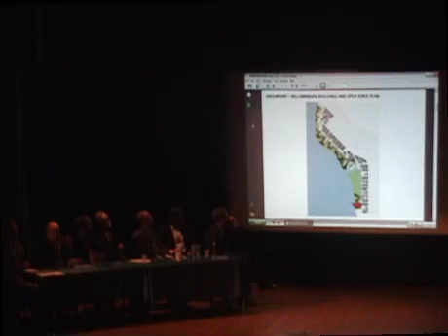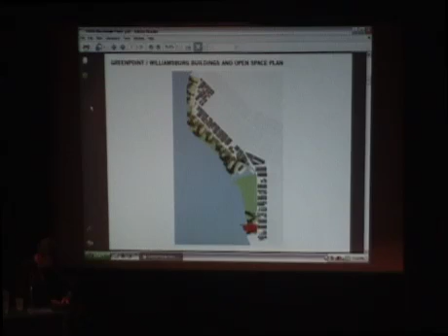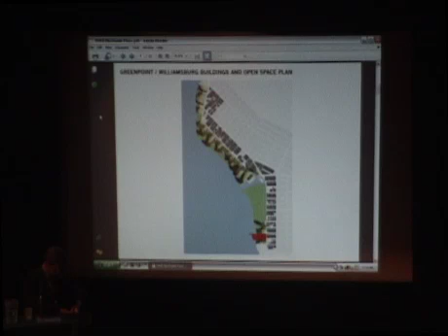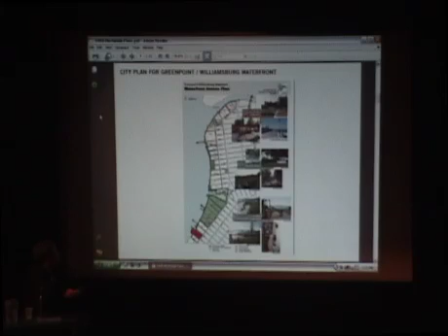This was already shown, but it really lays out the city plan as Sean discussed in depth. So I'll keep going with our side at the end. So how do we really put the floor area and craft a plan on the site?

As Ron said, it was a large site - sort of a block and a third in its north-south direction, very long in its east-west direction. Our concept was really to take the market rate housing as much as possible in towers that maximize views and that created a space that...

Really, much like the three towers at the NYU housing, the IM Pei NYU housing, but then unlike the NYU housing, it was buffered and locked into the neighborhood through low-rise development. If you go to the next slide, really retail activation - this is a ground floor plan.

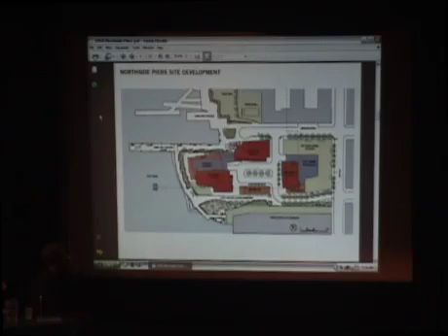So you see the center court, the three entrances to the market rate housing, the sort of liner of retail and townhouses and loft units that really face the public way and the upland connections and the roads that bring you to the waterfront. And then, of course, there's a great waterfront development and pier reclamation as part of the esplanade.

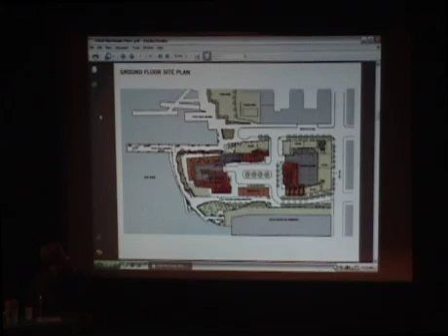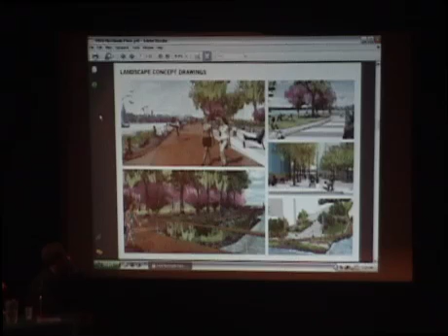If you go to the next slide, working with Donna Walcavage, the landscape architect - she really crafted a great plan along the guidelines for all of the esplanade here, upland connections and so forth that really will activate and bind together all these various different projects.

So from an architectural and massing point of view, we really used what I call the Vancouver strategy, which is townhouses and towers. You basically make as low-rise pieces as possible - 3 to 6 story townhouses and the affordable units - and then concentrate the market rate buildings in towers, sort of avoiding the mid-rise buildings.

And this basically creates street wall continuity, it creates eyes on the street, it creates retail continuity, but at the same time, it puts people up in the air where they want to be. Next - and so this is a view.

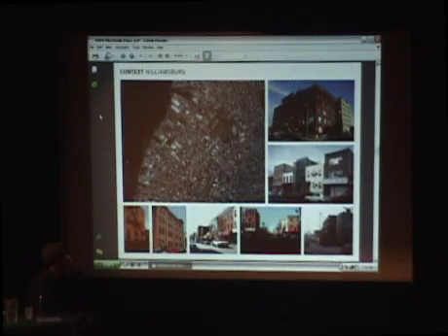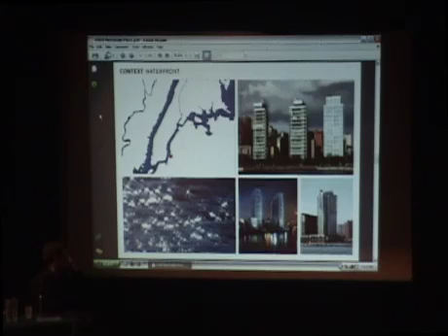So here you see the two together: the towers on the water, which were much more glassy, much more about being in a waterfront environment, and then something that was much more masonry and recalled the lower scale on the left of this slide.

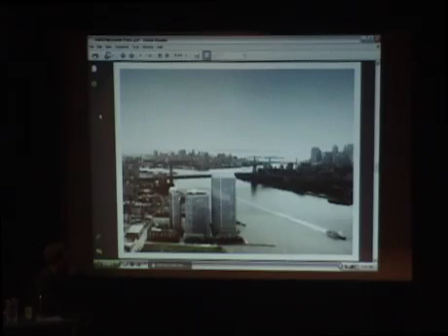And this is what it looks like from the inside. Real connection to the river traffic, to the bridges. That's really the appeal of living on the waterfront.

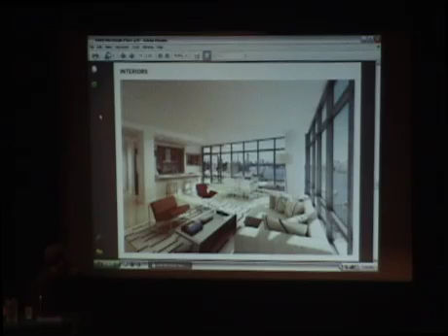And that was further reinforced by balconies stretching out into the landscape with terraces and so forth. So you really get this connection between inside and outside.

And then if you fold that into the part that looks back to the Williamsburg context, this is the frontispiece to the project that lines Kent Avenue, the 6-story inclusionary housing piece with retail at the bottom. The two work, I think, very well together in juxtaposition.

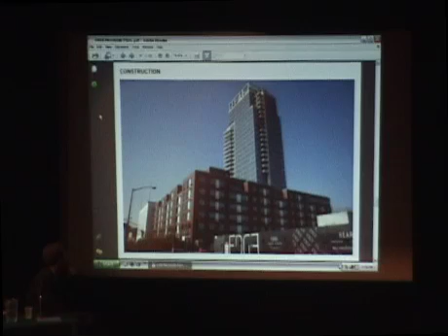And then it all sort of comes together at the entrances of the building. The tower is lifted up so you can get into it. It's lighter on its feet, and then it's bracketed and put in the setting of more masonry townhouses.

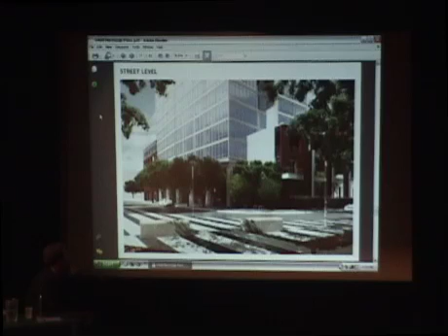This was a slide from a few weeks ago where you start to see the pieces come together: the eyes on the street, the street wall continuity of the townhouses, of the housing, of the retail, and then the more outwardly looking all-glass towers.

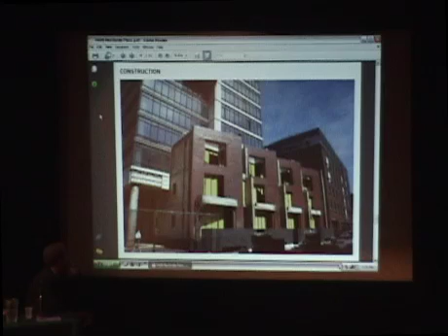Then you have the tower, which is more of a concrete frame construction with glass curtain wall, and they're all surrounding this green roof that sits on a steel podium.

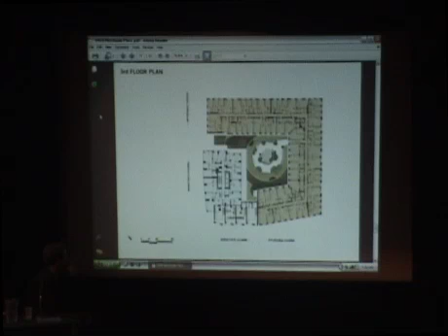This really shows how all the pieces lock together. One of the, I think, urbanistically very important things about the zoning was that parking was required, but it had to be shielded from the street. So all the parking is inboard, and there's always a liner of habitable space, whether it's retail or, in this case, housing. This is the low-rise housing, and that's the tower.